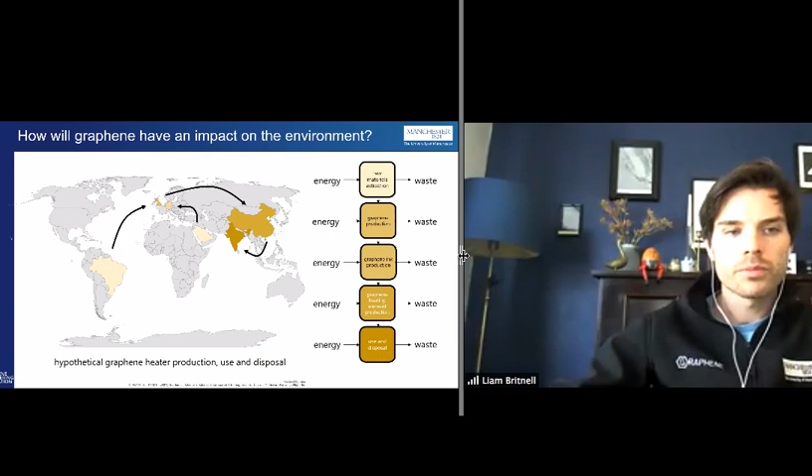So, for example, if a process is getting more and more efficient over time, of course, that's going to give us savings. And that's particularly key for new and emerging materials, things like 2D materials, where for the most part the process has not been optimized. Most haven't been scaled up. We've not included things like energy recovery or material recovery in those processes.

So it's also going to be dependent on where in the world these steps are happening. For various reasons, but one very simple one is the makeup of the electricity supply. It's going to vary from country to country, with different levels of renewable resources used.

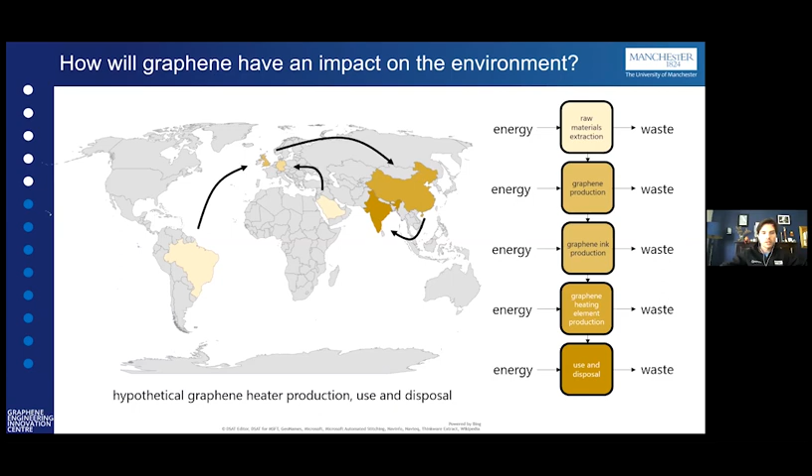So if we just think about this life cycle analysis in a bit more detail, because we'll use it for looking at the graphene production processes. The first thing to say is it's underpinned by ISO 14040, and you can find more information about how these analyses are performed in accordance with that there.

So it's a tool that's used to support, and it's probably key to emphasize support, environmental decision making, environmental strategies, business planning, and you see that the likes of BASF and General Electric reportedly use it quite widely for strategic planning purposes. So it's often used as a comparative assessment tool.

Used for perhaps looking at cleaner technologies, and I've also picked out here thinking about unintended consequences, and it can help to tease out some of those as well. So introducing a process that prevents use of toxic materials, we need to understand whether that has knock-on impacts, and so on.

So typically the outputs are things like global warming potential, resource depletion, anything that's deemed harmful to the environment, and depending how this is done, there might be 10 or 12 of these outputs, each of which is given some significance in the analysis.

And these kinds of analysis are not without critics either. Some of the limitations: the data that we get out is only going to be as good as the data that we put in. Data gaps, inaccurate assumptions, and so on are going to lead to inaccuracies and uncertainty. And this is particularly present for something like graphene, where we don't have databases of different production methods for graphene built into the kind of software that does these.

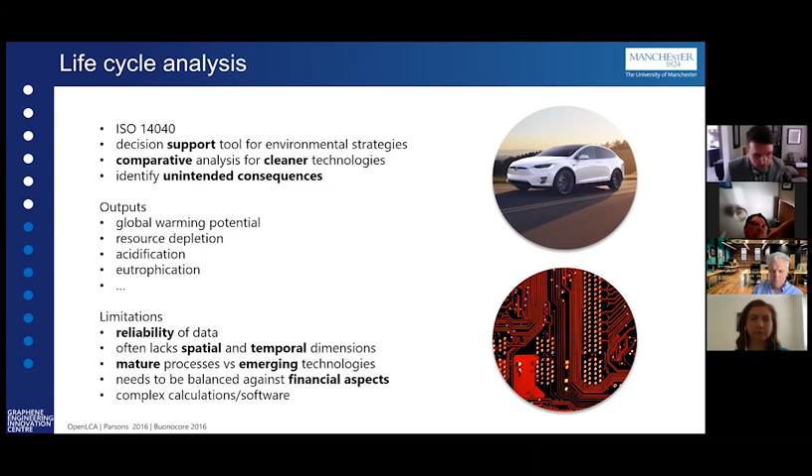And the last point I'll make is just a note of warning, really. It's very easy to try and compare numbers from different studies that are done on this, and of course, without an understanding of what the goals or the scope of these original studies are, it's very easy to make apples to oranges type comparisons.

So I think the points to really make as take-home messages here: we need an understanding of this whole system, not just our part within it, whether that's as a producer of graphene or a component producer. And we need to think about these knock-on effects. And I think it's also an opportunity, as the graphene community grows, to think about how we can effectively share data in a transparent fashion to make these kinds of decisions.

Liam, can I just jump in there on that previous slide? Mike Shaver made a good comment. Mike, would you want to just expand on that comment? Because I think it's quite a useful one about life cycle analysis.

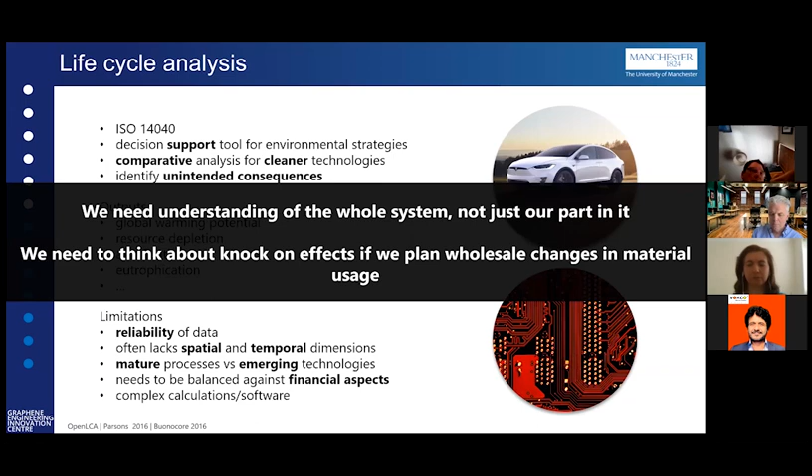And yeah, I think even if we look at the plastics industry, there's a lot of debate in terms of the quality of LCA, right? You can choose your metrics to make something look good or make something look bad. And so if you look at plastics and packaging, there's a lot of work now at evolving what it means to compare two different end-of-life pathways. So a robust thing versus something that's easy to recycle.

And so there's a number of groups within the UK and actually in the US as well that are developing those things. So don't just limit yourself to ISO 14040, but take advantage of the fact that really the UK is leading in this space at developing next generation LCA tools. But you are completely correct that it's a systems approach and it's underpinned by open data. And so it requires companies to actually be honest about what they're doing.

Thanks, Mike. That's a very salient point. Yeah, and particularly from the point of view of GEIC, we're very keen to work closely with people like yourself and other institutes that understand these types of analysis well. So I'll just jump on to the next slide.

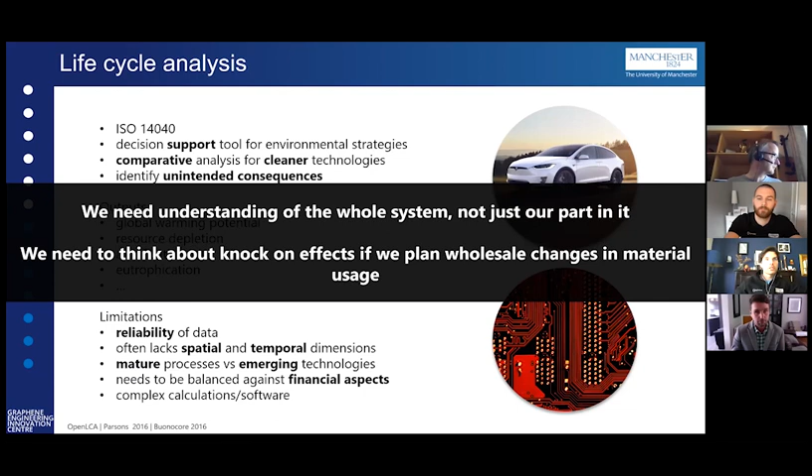So bearing what Mike's just said in mind, let's look at a particular example of this. It's a couple of years out of date, and generally there isn't a huge amount of published literature on these kinds of things. This is particularly focused on the cradle to gate production of graphene. Perhaps some of the uncertainties about end of life are less important here, but nevertheless, let's bear that in mind.

So this particular study looked at frozen in time processes. Frozen in time, I mean, they're a couple of years out of date now, perhaps, looking at oxidation reduction, electrochemical exfoliation, chemical vapor deposition.

And I want to emphasize, I think this is quite key here, that I'm not suggesting for a minute that we use these kinds of numbers to determine the type of graphene we should be using in any particular application. The properties we'll get in application will be determined by the type of graphene and its process. So simply trying to minimize these numbers is not really a game that we want to play. But the point I'm trying to get across here is that we at least need some basic understanding of this in order to make comparisons.

And the other thing I want to look at, apart from the bare numbers, is really the trends. So of course, as we scale any of these processes from a lab scale up to a commercial scale, we're going to see improvements, particularly when we look at energy intensive processes, if we're talking about reducing or moving towards renewable sources of electricity.

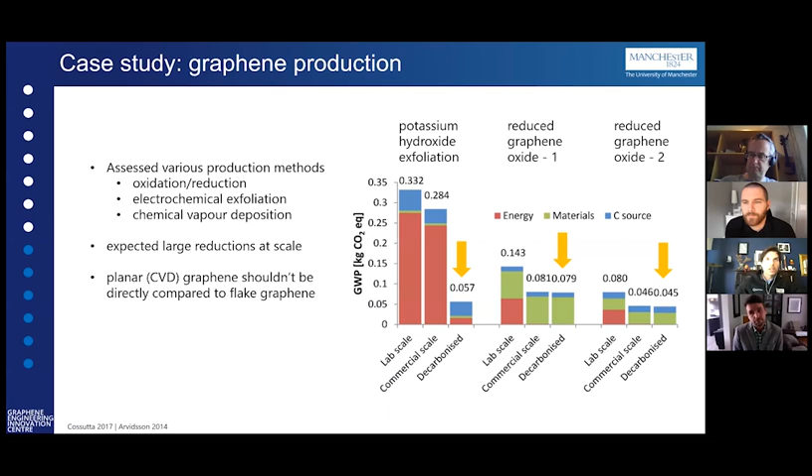So with that in mind, I just wanted to emphasize that again. If we look at the range of nanomaterials, nanosilvers, carbon nanotubes, etc., we see that it's quite common to have high impact. Production is also only part of the story. So benefits in performance improvements, which mean that we get longer life or increased durability, smaller material usage, and so on, are obviously going to be weighed up against this.

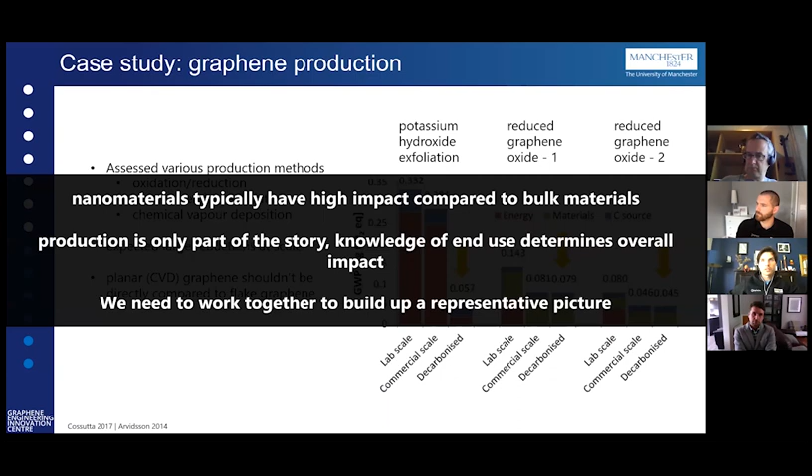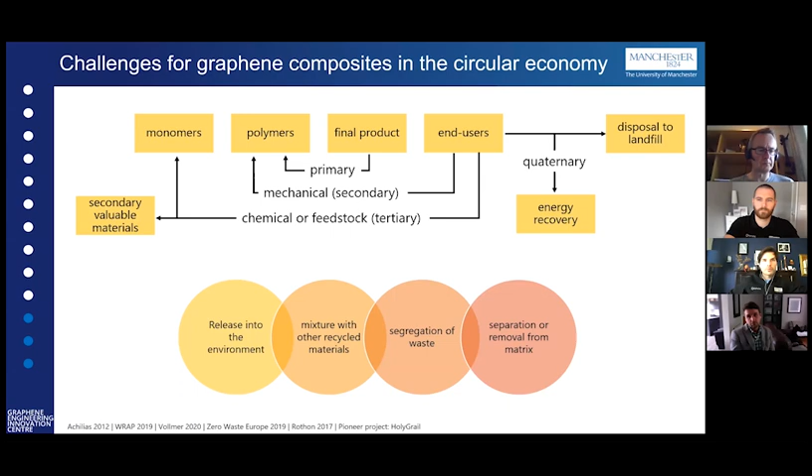And there's still a certain amount of uncertainty about what the market adoption is going to be in any of these sectors. But if we try and simplify it, we can think about something like closed loop recycling, where we have a good level of segregation from other waste streams, and materials are generally reformed into similar or the same products with similar material properties. An example being something like glass, a simple example. But again, the segregation from other waste is going to be key.

You can also think about something more like open loop recycling, where typically there's going to be a greater mixture of materials, and in most cases the materials are recycled into an inferior product in terms of material properties. So I guess closed loop recycling, perhaps Mike may disagree, I don't know, is sometimes seen as the holy grail of recycling. The idea being that we can reuse material without the need to introduce virgin material to maintain those properties. And one particular key challenge we're going to look at is the segregation of that waste.

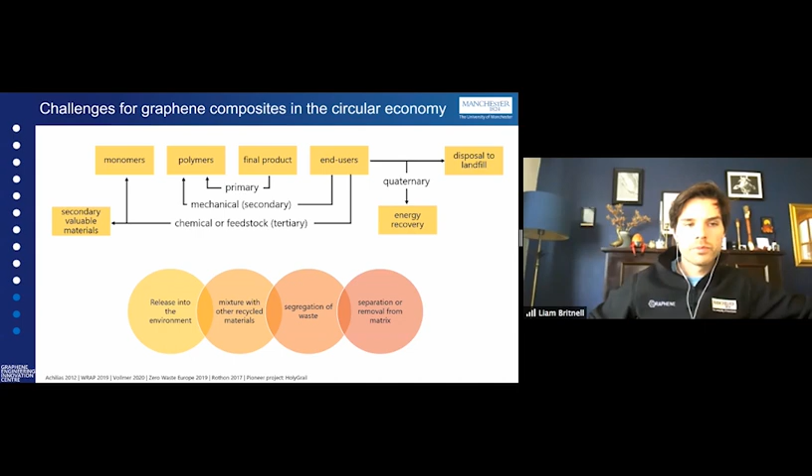I know this is something that Mike's interested in, a reliable and viable way to sort them. And I think that for some this might sound unrealistic, but there is good progress in the packaging industry, in industry-wide collaborations, looking at smarter automated sorting systems, using things like chemical tagging, digital watermarks, and so on. And this is part of the growing trend of producer responsibility. And I think as people involved in the graphene supply chain, we should think about this. And if we can justify the use of graphene based on its performance improvements and its reduction of impact generally, then we can work with those technologies to ensure that we mitigate the end of life impact.

So in addition, that's going to lead me to my next point, which is keeping graphene composites separate from other materials is perhaps something that we should be striving for in any case. So if we consider how much time, effort, resources has gone in and will continue to go into getting just the right graphene into just the right matrix, in order to maximize the performance benefits, we don't want to lose that at the first recycling step.

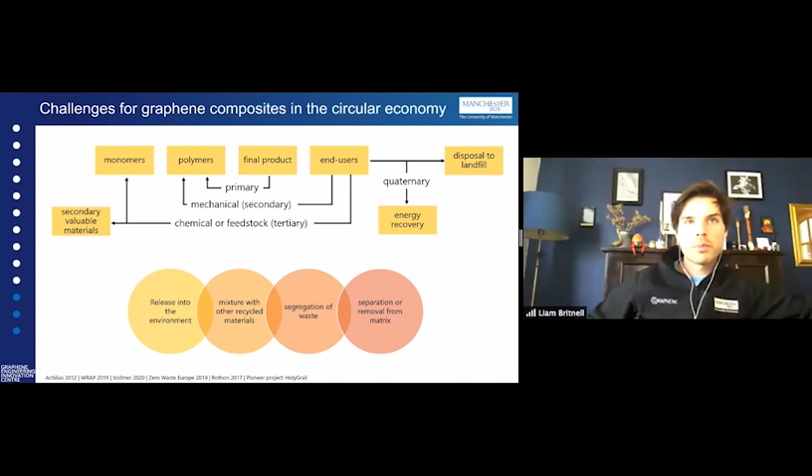So I guess the other option is to put a stronger focus on use of graphene in plastics which might be more amenable to some form of chemical recycling. Again, where we're depolymerizing the plastic back to a more basic form. We can think about removal, recovery of graphene more easily than we can from a melted system. And we can also think about preventing graphene getting into other plastics and causing greater wastage. So I think these are both options which retain as much value in both graphene and the constituents and the host matrix as possible.

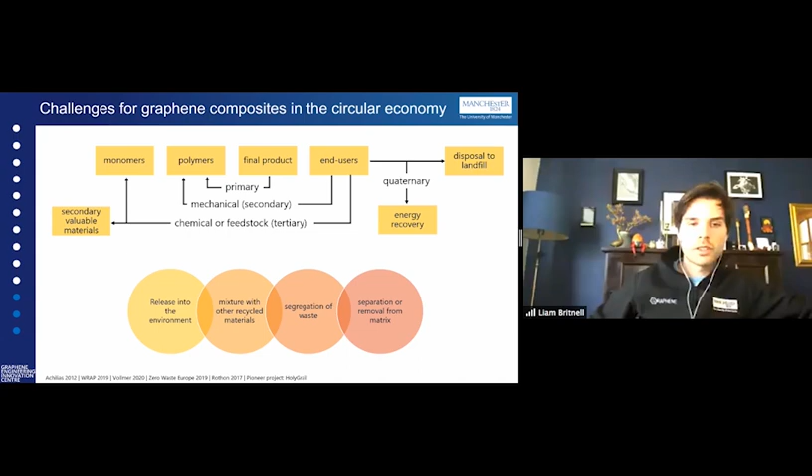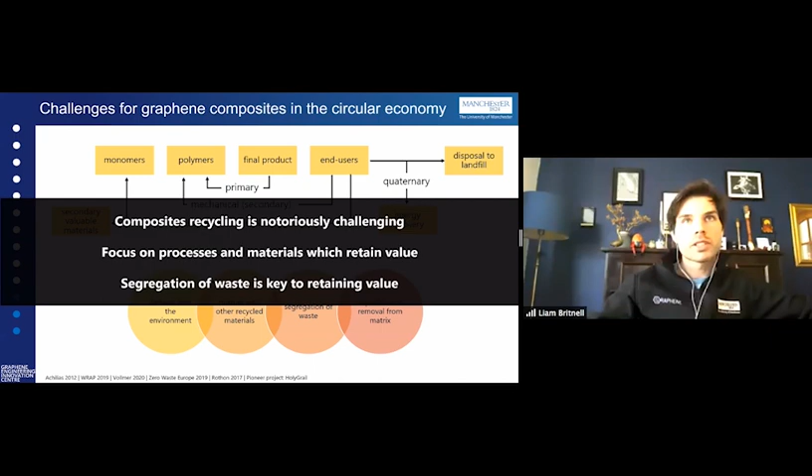So I want to just jump then, after looking at these take-home messages. So composite recycling is notoriously challenging. I think we need to focus on processes and materials which retain the value, and segregation of waste is going to be key to that. So I just want to jump now onto some of the opportunities which we're involved with.

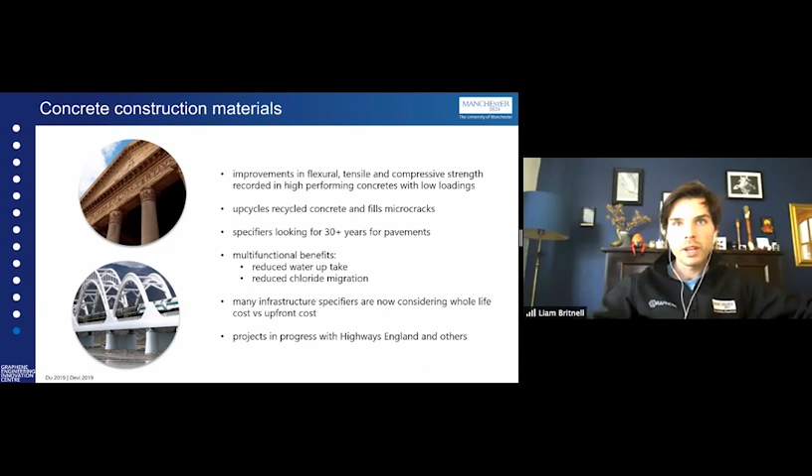I think generally we've seen this as an area that's certainly increasing in interest. For quite large infrastructure projects, there's an increasing focus now on whole life costs, not simply upfront costs. So this is an opportunity for materials like graphene, which might struggle against commodity materials on an upfront cost basis. But when we consider the benefits over the lifetime, it becomes much more beneficial. We have ongoing projects with partners in this area.

So a couple more examples, where graphene is being used again as a sort of filler, but perhaps in upcycling of recycled materials.

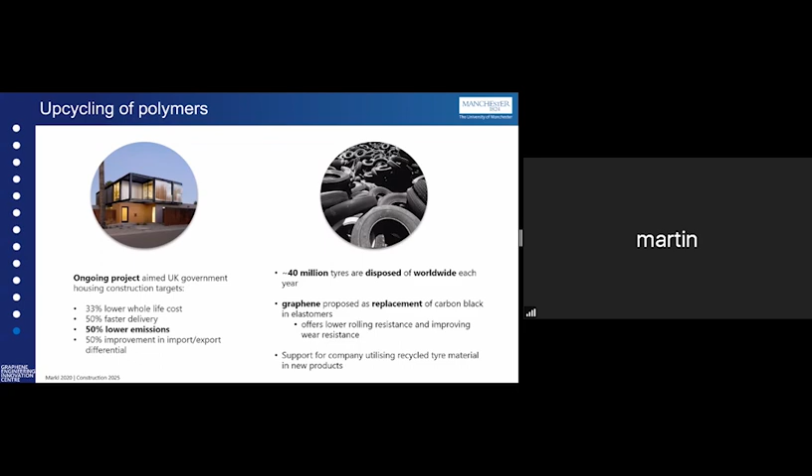So the first on the left relates to what was really spurred on by this severe housing shortage that we have in the UK. And the government set some quite clear targets to the construction industry in general about reducing costs, building faster, lowering emissions, and so on.

So with that in mind, last summer we ran a study which hasn't been published, but we were basically comparing the use of graphene in recycled polymers to virgin plastics, to other conventional building materials, looking at some elements of life cycle assessment, looking at the panel designs for modular homes, doing engineering calculations, looking at thermal efficiencies and structure and so on.

And we really wanted to understand what the availability of these recycled plastics was in the UK, and the use of those in potentially long-term sequestering of that in structures, and simultaneously solve societal housing challenges. So taking what otherwise might be waste going to landfill, we've begun designing a multifunctional panel structure to use as a building block for building homes, with the aim that it would be swiftly assembled and installed with the level of functionality that we require in modern homes.

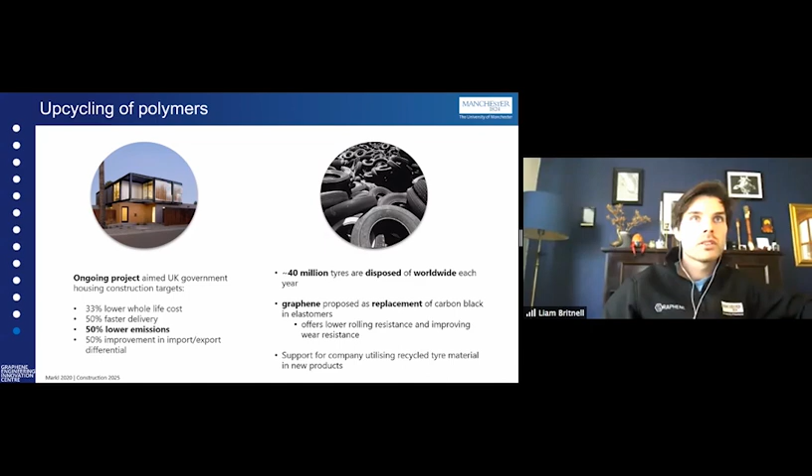So I don't know how I'm doing for time, Nick. Fine, okay, carry on. You're nearly done, aren't you?

Yeah. So I just wanted to say what the GEIC's doing about this. So I think over the last 6-12 months, there's been an increasing understanding that we need to shift a stronger focus towards sustainability, particularly in helping the community as a whole on some of these grander challenges, and particularly around transparent data sharing and so on.

So we're running, as I've already mentioned, internally and externally funded projects, with primary outputs being sustainable development goals, promoting sustainability within projects, offering support. We will be on reducing impact, perhaps running some of these types of analysis as we've discussed here. We'll be nominating a sustainability champion within GEIC to try and lead some of these ideas forward, and collaborate with the Henry Royce Institute and others. And perhaps Mike wants to say a little bit about a new hub that was recently announced in Manchester in this regard.

And just finally, some take-home messages. So I think, clearly many opportunities in sustainable development of graphene, far more than I focused on here. I could have spent the whole half hour or 40 minutes on that. But I think the key is really thinking about the end of life at the conceptual stage. So trying to design durability and recyclability into products from the very beginning is key, not as an afterthought. We really need to think about this as a whole material system and not just our part of the system in isolation.